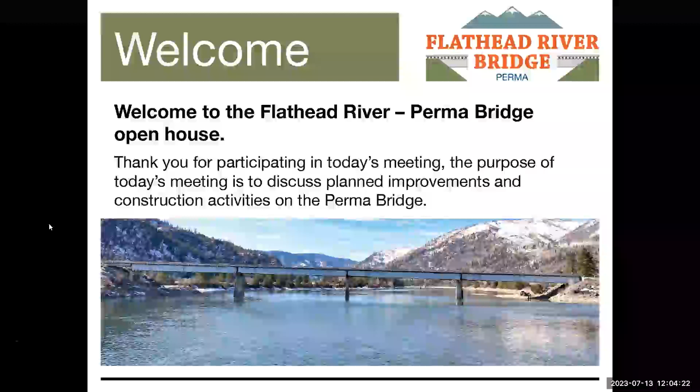All right, thank you, Brandon. Good afternoon everyone, my name is Daryl Williams. I work for MDT, and I am the District Construction Operations Engineer for the Missoula District. I will be assisting our project manager, John Benda, who is also on the call with contract administration for this project. MDT's mission is to serve the public by providing a transportation system and services that emphasize quality, safety, cost effectiveness, economic vitality, and sensitivity to the environment.

MDT maintains a staff with the resources and technical expertise needed to perform the workload for the majority of the state's transportation projects. However, when MDT does not have the resources or technical expertise in-house, we often hire consultants for specific work. Consultants are an extension of MDT staff, capable of providing additional skills, experience, expertise, and quality work without increasing our in-house staff here at MDT. They are managed by the MDT Consultant Design Bureau and work together with the MDT project team and management to deliver the project. This is the case on this project, as MDT has selected a design build team.

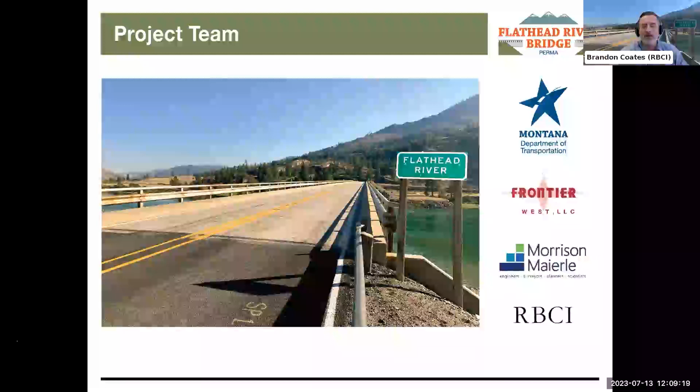Awesome, thank you Tyler. And Brandon Coates. Hello again everybody, I'm Brandon Coates with RBCI, and we are doing the public outreach and public involvement on the project. So we will be the main point of contact for communication with the project team, and we will be the ones responsible for getting project information out to the public and to the media. Thank you for joining us.

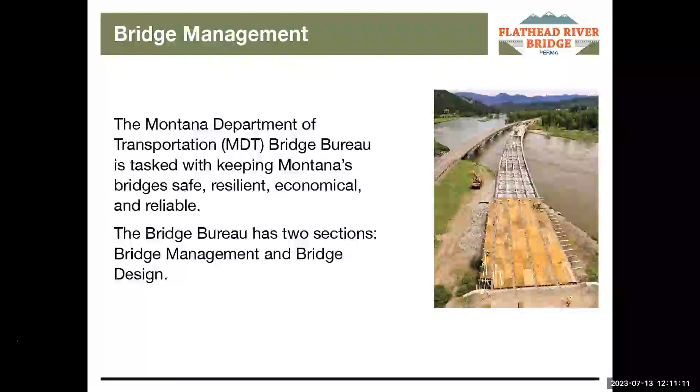MDT is rehabilitating the bridge that carries secondary highway 382 traffic over the Flathead River near Perma. The bridge is a 5-span, 653-foot long bridge. This bridge was originally constructed in the early 1960s and needs repairs.

Beth will get into the specifics of the repairs that will be completed on the bridge later in the presentation. The amount of wear and tear on the bridge is normal for a bridge of its age. One thing to note, the bridge is currently safe to drive on.

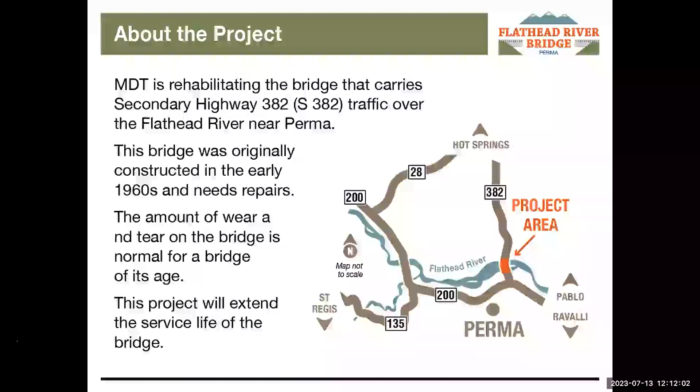MDT is completing similar bridge rehab projects around the state that have similar aging issues. This project will extend the service life of the bridge. Next slide, please.

MDT partnered with Frontier West and Morrison Maierle to evaluate and develop plans for the needed repairs and construct the improvements that will extend the life of the bridge. The project is being delivered through a method called design build delivery.

This delivery method allows the design engineer and the construction contractor to collaborate on the design and construction. MDT often uses this process to expedite the development and construction of a project. This project was also a good fit for the design build process because the collaboration between design and construction staff promotes innovative methods for repairs.

The Frontier West Morrison Maierle team was selected in March of 2023 through a competitive best value selection. The team hit the ground running immediately after award with design development activities. Some of those design activities included field evaluations, alternatives analysis, plan reviews, environmental documentation, and coordination with local agencies.

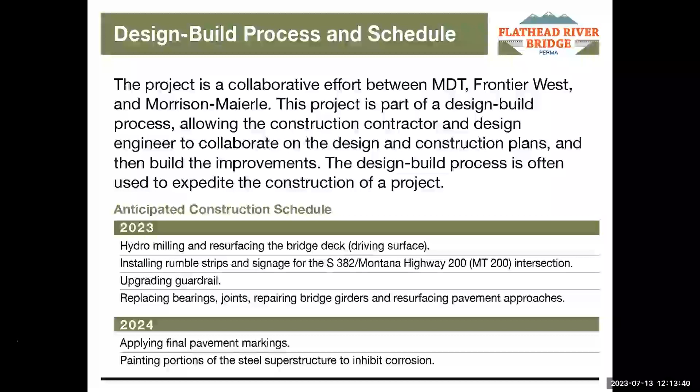The current schedule is suggesting that construction could begin as early as July 24th of this year. Chris Anderson will be elaborating a little bit more on the construction schedule later in the presentation. Next slide, please.

MDT will communicate and coordinate with local officials from Sanders County and the Confederated Salish and Kootenai Tribes, CSKT, to ensure critical services will continue in the project area throughout construction. The project team will meet with emergency responders to ensure any potential emergencies in the project area can be responded to in a safe and timely manner.

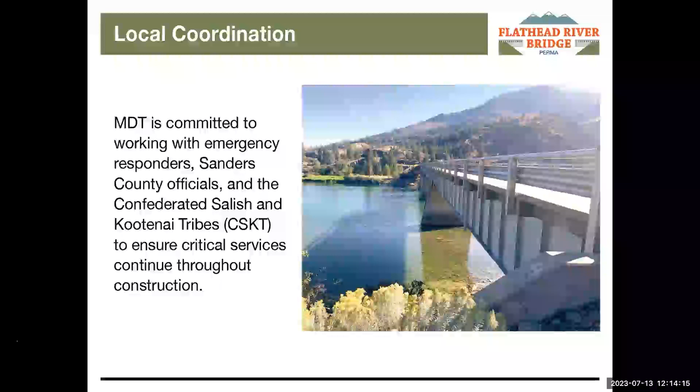In addition to that, we'll be painting some portions of the steel superstructure of the bridge. Bridge painting is associated with mitigating rust and corrosion and preventing rust and corrosion on these steel elements, so it's less related to aesthetics. With that in mind, we're really looking at doing some select painting of this structure where it's most susceptible to rust.

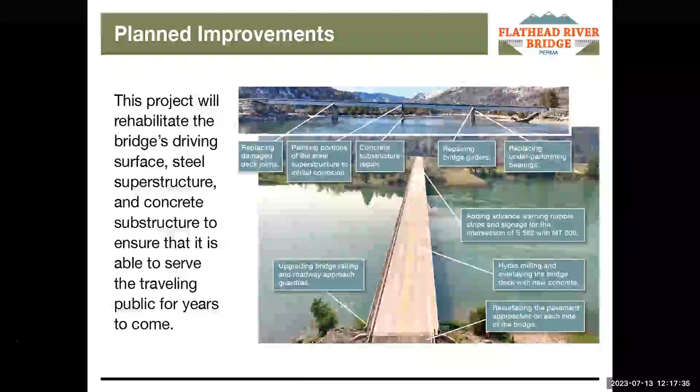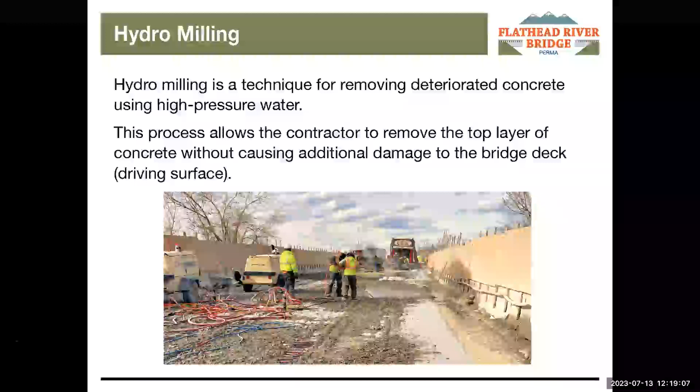An interesting aspect of this project is that we're planning to complete that concrete removal through hydromilling. Essentially, we're using really high pressure water to remove that top layer of concrete. There are a lot of benefits to using this water removal technique as opposed to a mechanical means of removal. By using high pressure water, we reduce the risk of damaging all the existing reinforcing that's embedded in the bridge deck that we want to keep. Whereas if you're out there with a grinding machine, like a mechanical miller, there's a lot greater risk to that rebar. So this is a cool operation you guys will see out there as you're driving through the project location while it's under construction.

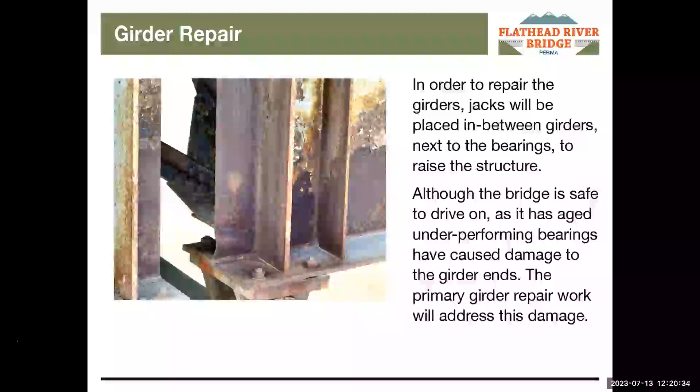And the bridge, while this isn't a structural concern yet, it could definitely become an issue for the structure if we don't do something to repair it and mitigate what's causing this. So I guess maybe next slide. I think this picture kind of answers the question of what's causing these defects that we're seeing in the steel members.

So I think an interesting, maybe lesser known fact about bridges is that bridges move. There are actually a number of components designed in bridges to allow the structure to move, and one of those things are the bridge bearings. That's what the superstructure, which carries the road, sits on when it connects with its foundation elements. In this picture, the bearings are those larger steel devices that look like pins.

Thanks, Brandon, for pointing to that. For this particular bridge, those bearings are designed to handle rotation and translation needed to accommodate thermal contraction and expansion. As the bridge members heat up and cool down with changes in air temperature, they need to grow and shrink. By allowing for that movement to happen, we can alleviate some of the stresses that could build up in the structure—restraining that imposes a lot more force on it. So that's why we need to let the bridge move, and these fancy devices are how we accomplish that.

But as you can see, these old bearing devices are made up of steel, and they really rely on those big steel knuckles to be able to rotate about each other, and the rocker plate underneath to move back and forth. As things start to rust over time, and as dirt builds up in those elements, they end up seizing up in the long term. And unfortunately that's pretty common—bridges have a harsh life.

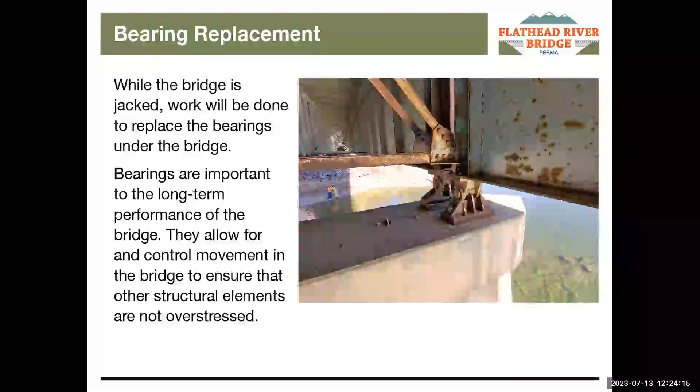This jacking operation is what's really requiring the short closure of the bridge. As you can imagine, jacking the structure off its support is done much more easily and safely without the addition of vehicle loads on top of the bridge. So that's what's driving the need for a really short-term closure. Chris is going to talk in a bit more detail about that, but I just wanted to provide more information about some of that work going on underneath the bridge.

Okay, so maybe next slide. As with any transportation project, there's a number of environmental considerations that are evaluated and assessed throughout the project development process. NEPA is really the guiding regulation, but MDT does pursue a very rigorous process to establish what factors may influence the design and construction of the project. So just a few interesting things that have been considered in the development of this project.

First off, migratory birds are definitely a thing—you see swallows building their little nests everywhere. We've actually been out on this bridge since early this spring removing nests to deter those migratory birds from nesting on the bridge this year while we're doing work out there, because we don't want nested birds to be disturbed or at risk because of our construction operations. So we're trying to mitigate our impact to migratory birds through that effort—that's something you may have seen on site already.

Another species of concern in this area is the bull trout, a threatened fish species native to the Flathead River. Our big goal to lessen our impact to the waterway and those fish is really to stay out of the water when it comes to our construction activities.

So we're going to be building false work that gets us access to the bridge to do repairs. That false work is essentially suspended from the structure, with no need to build temporary supports in the water. So that's really helping us lessen our impact in that sense.

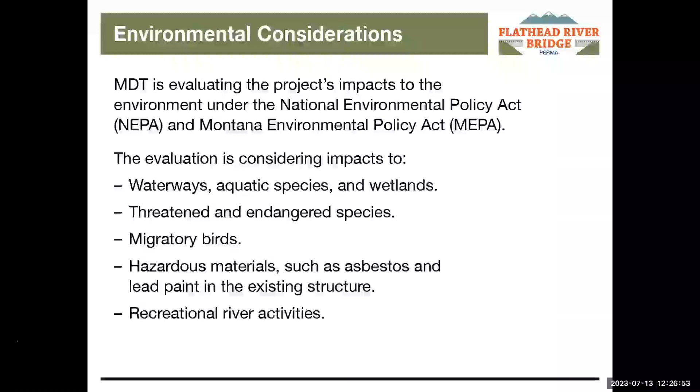Yeah, thanks, Beth. As Brandon had alluded earlier, we plan to start as early as July 24th, construction out there.

We do plan to do most of the work under one-way traffic with limited delays. The one lane should be flowing most of the time, but there may be certain times where we're moving equipment or materials on and off the bridge where we may have to shut it down for just a few minutes, and then we'll let traffic flow after that. So limited delays, one way, most of the time.

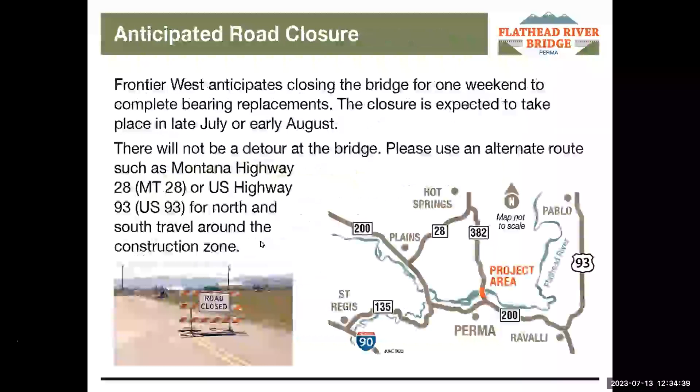But as far as the permanent solution, after the project is completed, we're not going to have a signal at that intersection, because this is a bridge-funded project, as Daryl alluded to when he kicked things off at the beginning of this meeting. Bridge funding is fairly limited, so we're really trying to keep the scope of work to the needs of the bridge.

And while Beth said that we do have some rumble strips in there, that was actually value added in their proposal, as they were going to be milling up the end of the bridge and the roadway section, so they had a good opportunity to put some rumble strips in. So, long answer, but we will not be having a signal at that intersection.